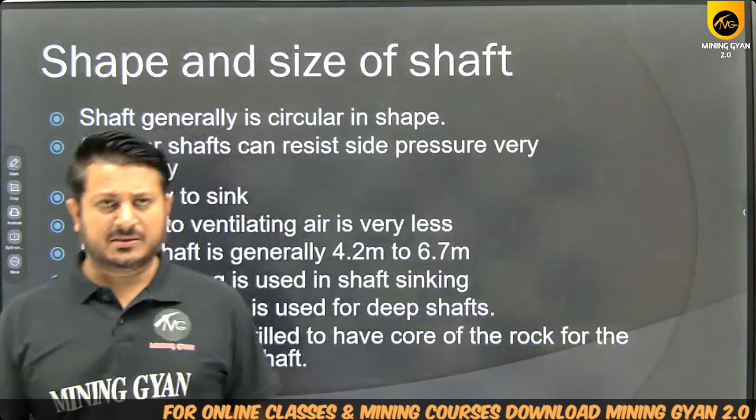So if we talk about the shape and size of the shaft, the shape of the shaft is generally circular. Most of the times it is circular only, and in some mines it is rectangular in shape, but most of the time it is circular in shape.

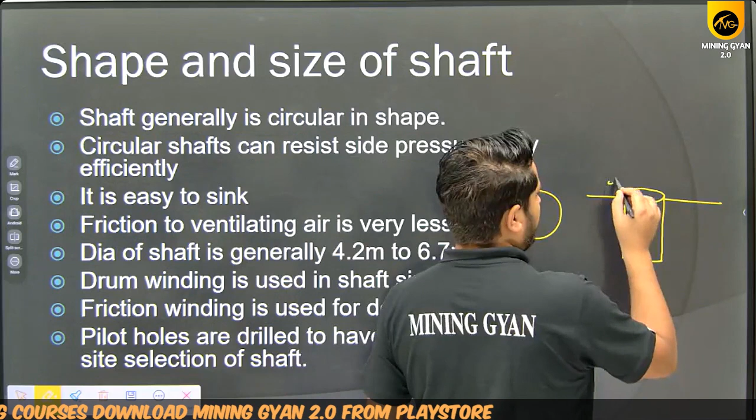As you can see over here, if this is a circular shaft, this is the top view, and this is the front view. Now if this is your surface, you can stand over here. Now this circular shaft, there will be a pressure from the sides over this circular shaft, over the entire length of this circular shaft. So this circular shaft will have to resist pressure from the sides which are occurring on it. If we see in the top view, the side pressures which are occurring on it are like this, this pressure, side pressure, will be like this if we see the top view.

Now if there is a rectangular shaft, then what will happen? What is the reason why we don't use to make a rectangular shaft? The reason for not making a rectangular shaft is that if the side pressure comes on it, then in that case they will bulge out. The sides of the shaft will bulge out like this. There will be a deformation.

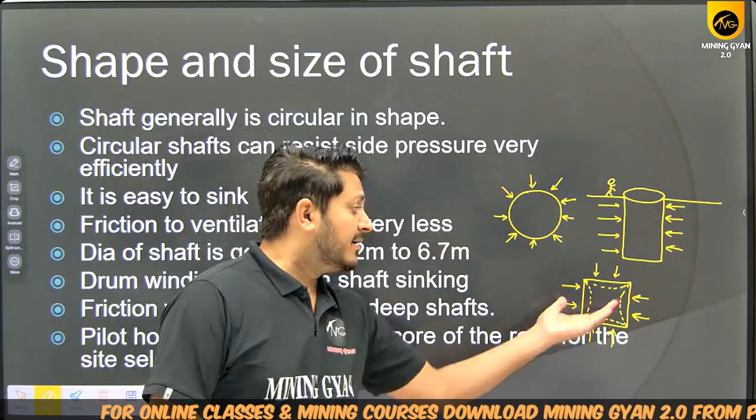While on the other hand, in a circular shaft no such cases can be seen, because there will be compression. If the side pressure comes, then in that case there will be compression from both the sides, and it can resist the side pressure much better than the rectangular shaft. That is the reason why rectangular shafts are not made. This is the reason.

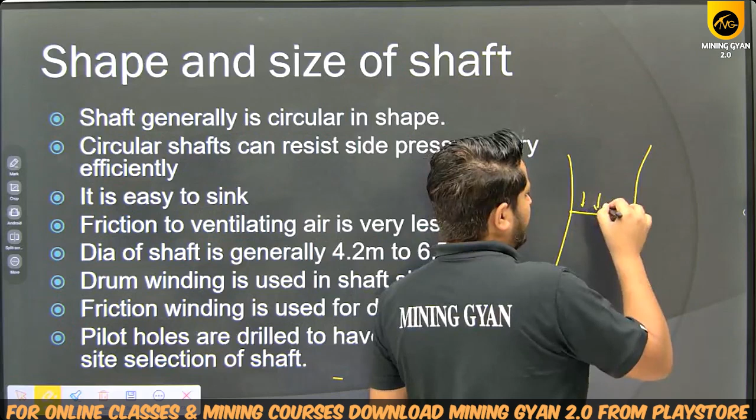Suppose, if you want to feel this thing a much more broader way, then I can give you an example. Suppose that there is a river. This is the top view of the river, you are watching it from the top. Now in this river, if we used to make a dam like this, then in that case what will happen? The water pressure will come over it, and due to that pressure, it will get deformed.

If there is high pressure, it will get deformed like this, and after some time, cracks will develop on it, and this will break. But if we follow the arch method - make the dam like this - now if the water pressure comes on it, there will be compression. The stress that will generate over here will be compression, and due to that stress, it may get straight, but it will resist much more better than this type of dam, that is dam number 1. Dam number 2 will resist much more better than dam number 1. This is called the arch method.

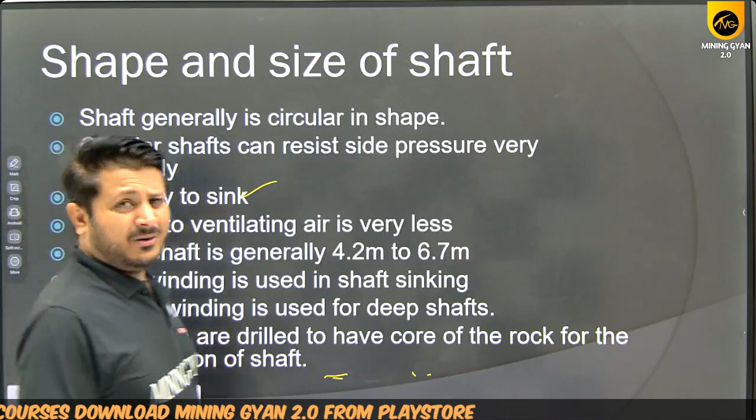Arch method. These are the things you have to remember. The most important thing is that circular shaft sinking is easy to sink. It is very easy to sink. Along with that, it provides less friction to the ventilating air as compared to the rectangular shaft. So there is very less friction to the ventilating air.

If we talk about the dia of the shaft, it is approximately 4.2 meter to 6.7 meter. For drum winding, if you want to do shaft sinking, drum winding is used. Just remember, in shaft sinking only drum winding is used. Friction winding is not used in shaft sinking. Friction winding can be used in deep shafts, but only after shaft sinking is complete. Otherwise, during shaft sinking you have to use the drum winding arrangement.

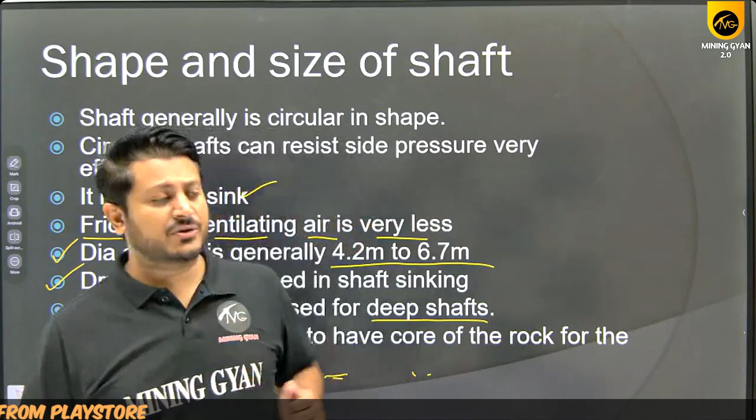For knowing this, we used to drill the pilot holes. With the help of the pilot holes we used to get the core, and with the help of that core we used to come to know what is the strata - is it a water bearing strata or not, is there any type of fault or geological disturbances or not. On that basis, what type of rock or strata is there, whether it's soft rock, soft soil, or a hard strata. In general, such information can be gained with the help of the pilot holes and the cores collected from them. This will help you out for the site selection of the shaft.

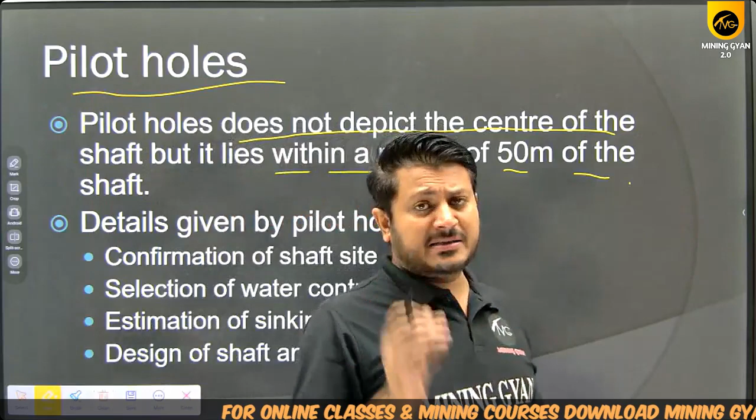चलिए, अब पायलट होल्स की बात उठी है तो देख लेते हैं पायलट होल्स क्या है। पायलट होल्स डज नॉट डिपिक्ट द सेंटर ऑफ द शाफ्ट, बट इट लाइज विदिन अ रेडियस ऑफ 50 मीटर ऑफ द शाफ्ट। आप ये नहीं सोचेंगे कि जहाँ पायलट होल ड्रिल किया वही शाफ्ट का सेंटर होगा। You should not think that if you have drilled a pilot hole then that pilot hole will be at the center of the shaft. No, it's not like that. The other case can be that the pilot holes will lie within a radius of 50 meter of the shaft, but they will not be the center of the shaft. You should remember this thing.

आपका पायलट होल शाफ्ट के 50 मीटर के रेडियस में होता है जनरली, बट वो शाफ्ट का सेंटर नहीं माना जा सकता। अब पायलट होल्स हमें क्या क्या डिटेल्स देता है? सबसे पहले तो कंफर्मेशन ऑफ द शाफ्ट साइट, इट गिव्स डिटेल्स अबाउट द कंफर्मेशन ऑफ द शाफ्ट साइट।

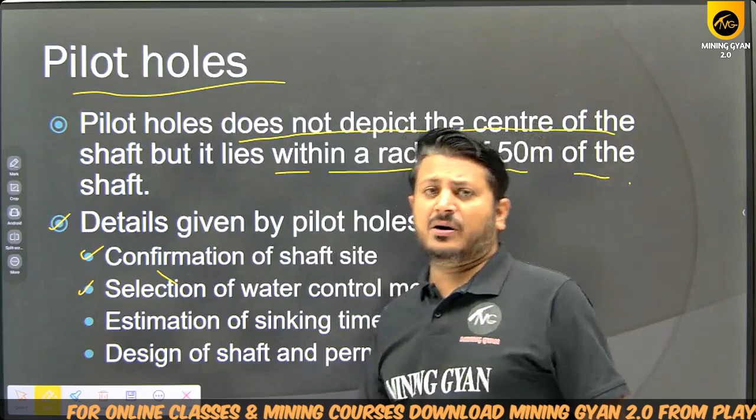On the other hand, selection of the water control methods. If you have a water bearing strata and you also have to construct the shaft, then in that case it will give you the method. On that basis, or on the basis of the study of the core, you can decide what type of water control methods should be applied in the mines, during shaft sinking or the whole life of the shaft, so that they should not get collapsed.

After that, estimation of the sinking time and the cost. You will also get the estimation of the cost, what amount of money you have to invest, and the time, what quantity of time you have to invest, because time is money. Just remember this thing, time is money.

Now, design of shaft and permanent lining. You can get the details. So if you have the details of the strata, what type of strata we have, what geological disturbances are there, then on that basis you will design your shaft. You will decide the permanent lining which has to be provided on the shaft, so that your shaft should remain stable till the whole life of the mines. Remember this thing.

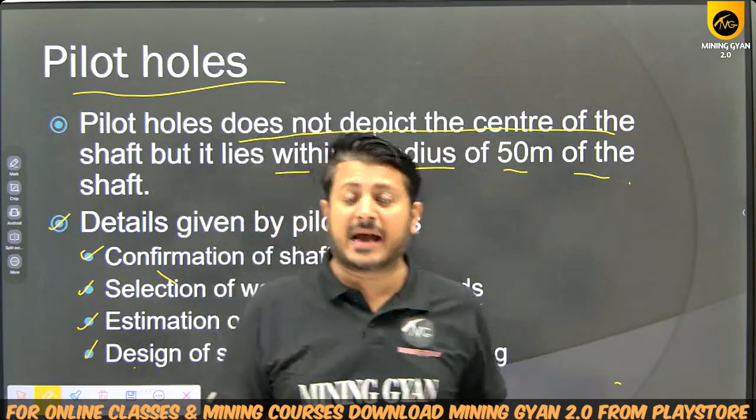सो आपका पायलट होल्स क्या क्या डिटेल्स देता है? ये सब बता देता है कि आपका शाफ्ट कहां बनाना है, इसकी जानकारी दे देता है। उसके साथ ही अगर आपको पता है कि मेरा वाटर बेयरिंग स्ट्राटा है, तो उस केस में वाटर को कंट्रोल करने के लिए क्या मेथड्स अपनाने हैं, ये जानकारी मिल जाएगी। उसके साथ ही आपको पता चल जाएगा कि कितना पैसा और कितना टाइम लगेगा, तो उसके बेसिस पे आप एस्टिमेट बना सकते हैं, नहीं तो बीच में पैसे खत्म हो गए तो काम रोक नहीं सकते। दूसरा, आपका शाफ्ट का डिजाइन भी आप डिसाइड करोगे और उसके साथ ही परमानेंट लाइनिंग भी डिसाइड करोगे कि आखिर कौन सी परमानेंट लाइनिंग प्रोवाइड करानी है।

अगर मैं बात करूं रेक्टेंगुलर शाफ्ट की, तो आपका रेक्टेंगुलर शाफ्ट कहां पर बना हुआ है? इंडिया में आपका मोचिया मोगरे माइंस, ये एक एग्जांपल है जो कि जावर, राजस्थान में है।

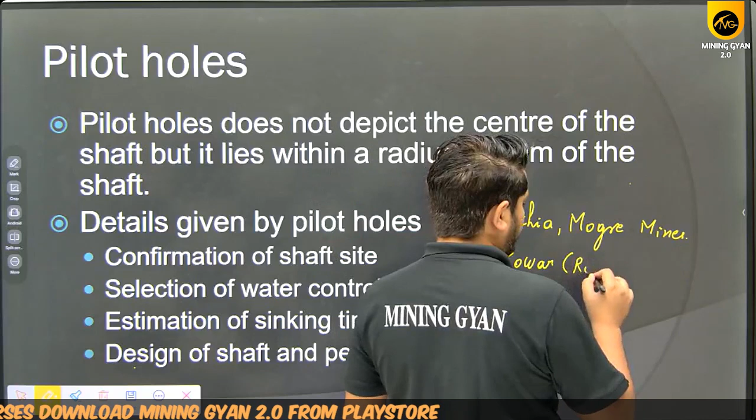A rectangular shaft has been constructed in the Mochia Mogre mines in Zawar, Rajasthan, by Hindustan Zinc Limited. It has a rectangular shaft of dimension 5.2 meter into 2.8 meter, and the depth of that shaft is 321 meters, having a 30 centimeter thick concrete lining.

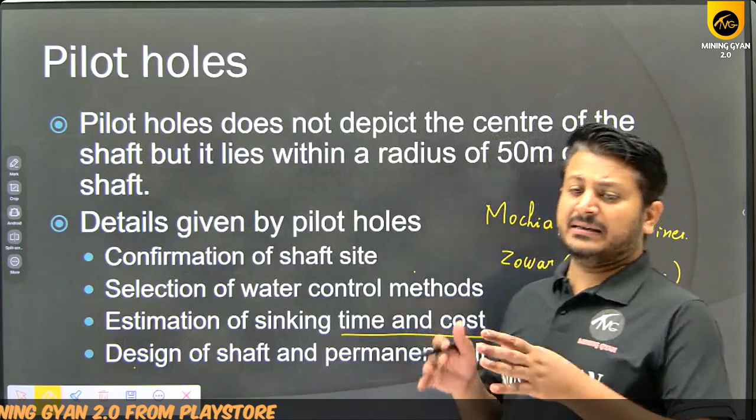Now if we talk about the cost of shaft sinking, earlier, based on the early data, the cost of shaft sinking was approximately 50,000 to 75,000 per meter. It includes all the things like sinking, lining with concrete, headgear, winding engine, and the concrete. All these things are included in this 50,000 to 75,000.

Okay, clear? Any type of doubt?

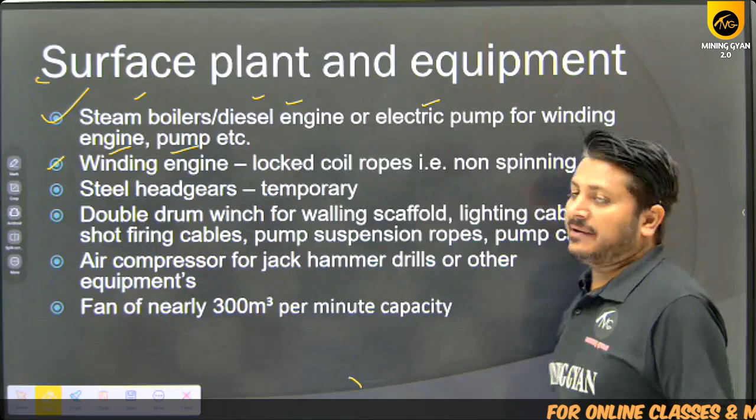The next thing which you have to arrange is the winding engine having locked coil ropes. What is the use of the locked coil ropes? Locked coil ropes are basically non-spinning type of ropes. You have to remember this thing. The reason for using locked coil ropes, or non-spinning type ropes, is that in the case of shaft sinking, the bucket is hung freely.

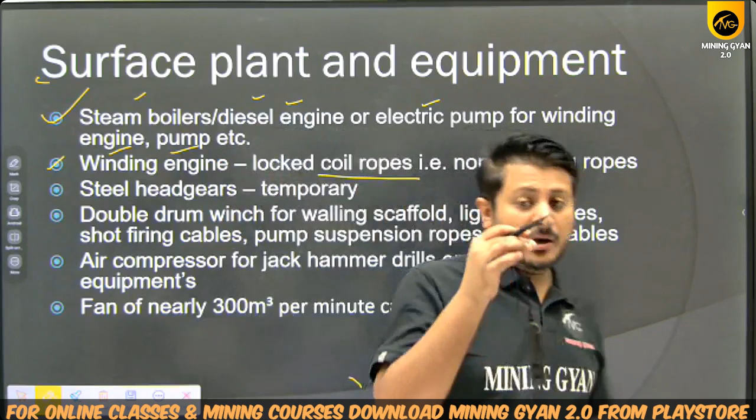Suppose that this is a bucket. If I use it to sink it, then it will rotate, like this. So this is called spinning, and to stop this kind of spinning, what we have to do is just use the locked coil ropes. Locked coil ropes will stop it from spinning, and this will go down directly.

Why does such kind of thing occur in the shaft sinking, during shaft sinking only? This cannot occur after the shaft sinking also.

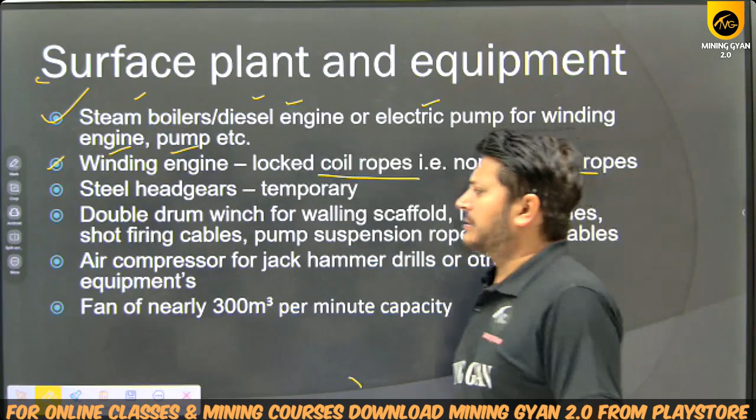So there is a steel headgear. This can be temporary, on a temporary basis. On the other hand, we will use the double drum winch for the walling scaffold. There is a winch, like during fishing, as you may have seen in the movies, where a winch arrangement is there in the fishing rod. With the help of that winch you can release the rope or wind the rope. Similarly, the double drum winch is placed during shaft sinking, so that...

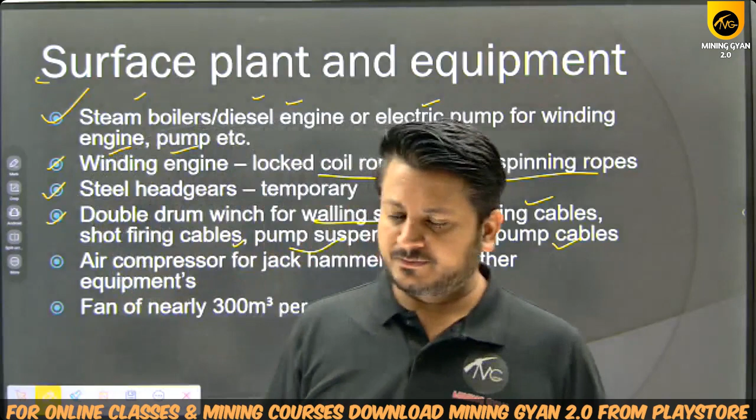...you can handle the walling scaffold, lighting cables, shot firing cables, pump suspension ropes, and the pump cables. All these things are controlled by the double drum winch, which is provided to suspend the walling scaffold, to hang the lighting cables, and for shot firing cables, pump suspension ropes, and pump cables - all these things are suspended using the double drum winch.

After that, an air compressor is installed, with the help of which you can operate the jack hammer drills and other equipments. There is a fan which has a capacity of 300 cubic meters per minute, placed near the shaft. The fan is placed in the shaft having the capacity of 300 cubic meters per minute.

So here a fan is also installed. As you can see over here, this is a shaft in which the rider is placed. This is your rider, this is your rider.

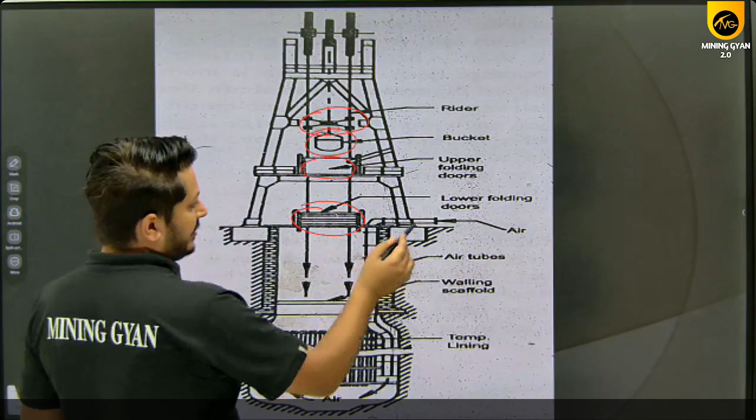Okay, this is your bucket. This is your upper folding door. This is your lower folding door. After that you have the air tubes running down the shaft, for providing air over here in this portion.

From here air comes out of the shaft. Now there is a walling scaffold. This is your walling scaffold.

Workers usually stand on this walling scaffold for providing the permanent lining. The other use of this walling scaffold is that it will help you out if anything drops from the top of the shaft. If anything drops from the top of the shaft, then it will not reach the man who is standing at the bottom of the shaft. No one will try to hurt anyone intentionally, but if by mistake something drops, then in that case it will provide safety.

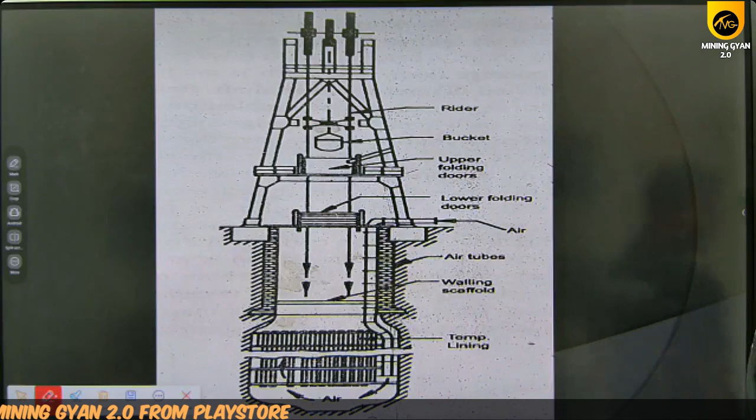What is the difference between swinging and spinning? I will show you, maybe if it does not fall, then it will be good.

This is called spinning, and this is called swinging. This is swinging and this is spinning. This is the basic difference between swinging and spinning, and the rider over here will help you out to prevent the swinging of the buckets.

So this is your rider, and after that you have the upper folding doors. Two doors you have, the upper folding door and the lower folding door. There is an air tube with the help of which you are able to provide air at the bottom of the shaft. After that you have a walling scaffold, over which your workers will stand and provide the permanent lining.

After that, your workers standing on it will provide permanent lining. Now at the bottom there is a temporary lining provided at the bottom, which will be removed after the depth of the shaft gets increased. Then after that you will provide the permanent lining.

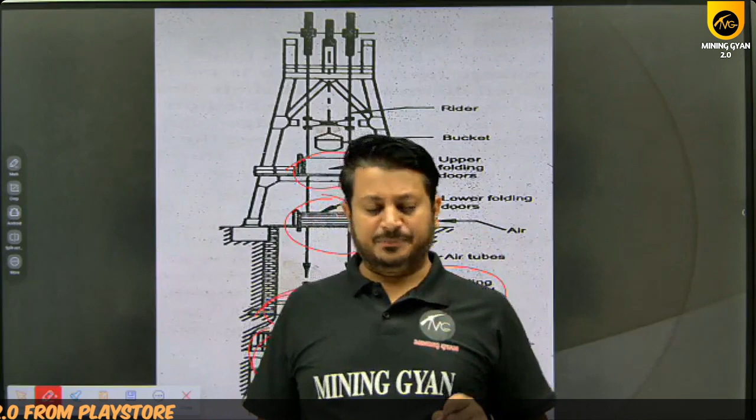Let me know if you are active in these classes, and if you have studied the legislation, tell me what must be the distance between shaft bottom and walling scaffold. Wait, I should write the question according to CMR 2017: what must be the distance between temporary permanent lining and bottom of the shaft? You have to answer these two things.

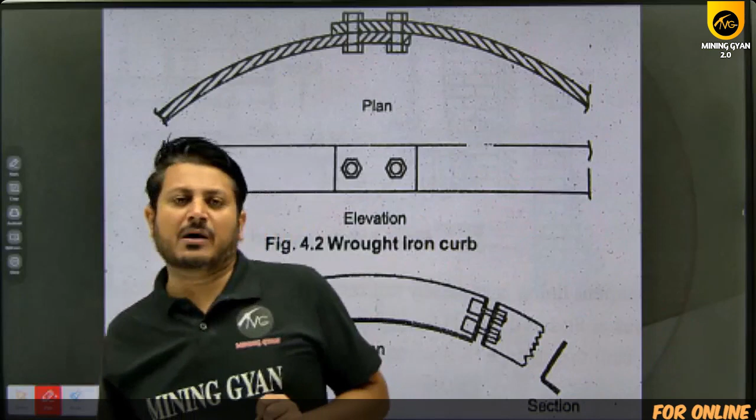Basically, if you want to do the shaft sinking for providing the temporary lining or the permanent lining, you have to place a circular ring all over the corner sides of the shaft. On this circular ring you can place your wooden planks, which will help you provide the permanent lining or the temporary lining. Both can be done with the help of this ring.

Along with that, all the equipment can be hung through it. This will help you control the shaft from collapsing.

The next arrangement you must have is the generator. It can be a diesel generator or a steam engine generator, and it will be used for lighting purposes.

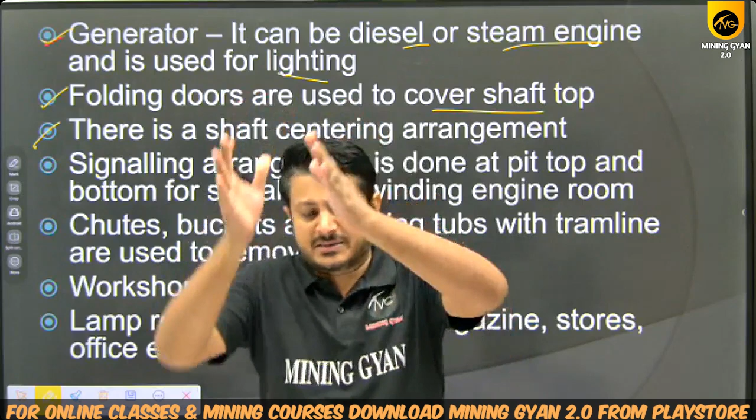After that, you need shaft centering arrangement. We cannot make the shaft in any random shape; we have to make a vertical shaft. So arrangements have to be made for shaft centering, from the center of which you can maintain your shaft diameter, and the shaft will go vertically downwards. This shaft centering arrangement is done.

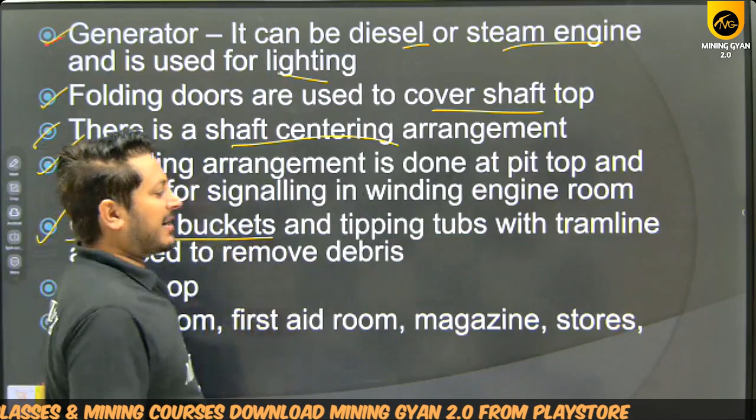Along with that, what else is needed? Chutes, buckets, tipping tubs with a tram line, so that debris can be removed. Debris means the waste material generated during shaft sinking, which can be removed with the help of chutes, buckets, or tipping tubs with a tram line.

There must be a workshop if any equipment gets damaged or needs maintenance. You must also have a lamp room, first aid room, magazine stores, and office, etc.

All these things have to be established on the surface. In this manner we have done all the arrangements for shaft sinking.

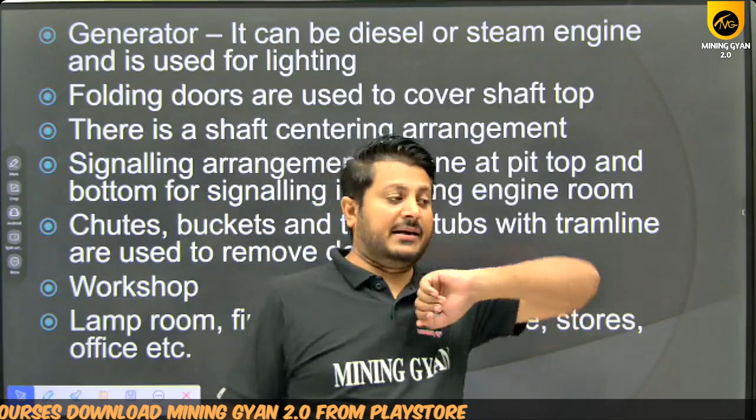Now we have to do the shaft sinking. First of all, we saw what the shape and size of the shaft should be. The second question was where we have to make our shaft, the site selection of the shaft. The third thing was what arrangements I have to do for shaft sinking. All the answers to these questions have been given. Now we have to find out how to do the shaft sinking.

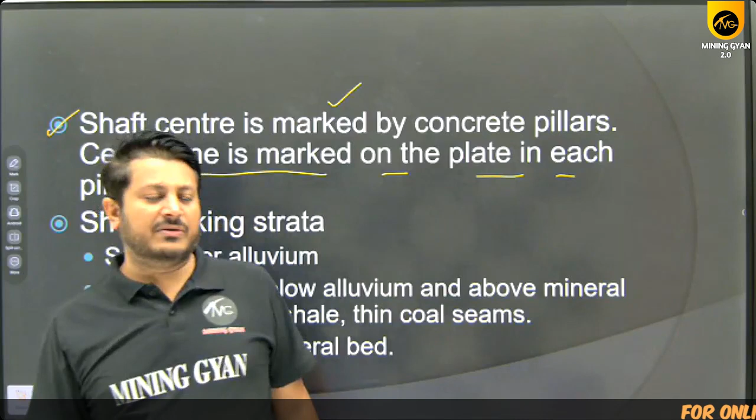Concrete pillars are made on which the center of the shaft is being marked, and there is a center line marked on a plate, and that plate is placed on these concrete pillars.

Now if we talk about the shaft sinking strata, what kind of strata will we get if we start shaft sinking? First of all we will get the subsoil and the alluvium. After that we will get the hard rocks, which will be present below the alluvium and above the mineral bed.

Sandstone, shale, thin coal seams. After that we will get the coal seam or the mineral bed. All these are the strata of shaft sinking which you will encounter during shaft sinking.

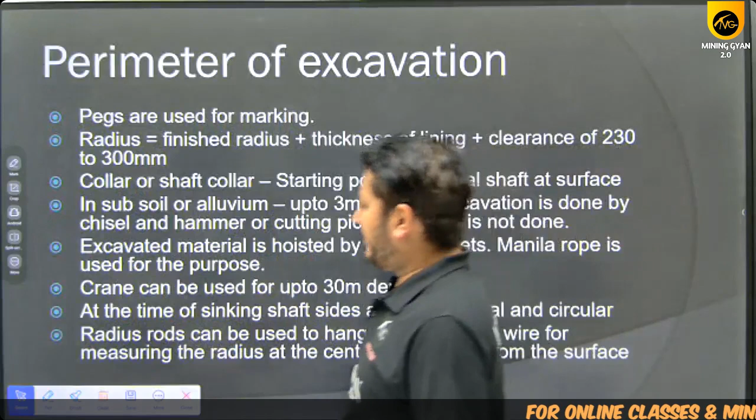Now, if we talk about the perimeter of the shaft, what must be the perimeter of the shaft? What do you mean by perimeter? That means perimeter of the shaft means circumference of the shaft.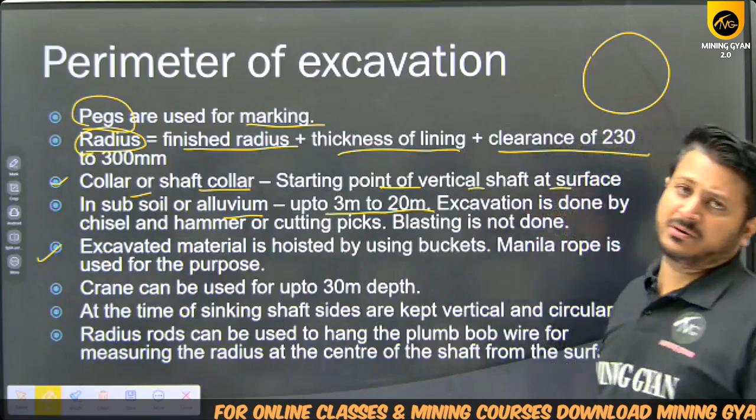After that, excavated material is hoisted with the help of buckets and the rope used for raising and lowering of the buckets. That rope is called the Manila rope. For that purpose, cranes can also be used, up to a depth of 30 meters.

At the time of sinking the shaft, the sides are kept vertical and circular. Radius rods can also be used to hang the plumb bob wire for measuring the radius at the center of the shaft from the surface. From the surface, you can measure the radius of the shaft by hanging the plumb bob wires at the center of the shaft.

After that, a concrete ring is placed over here, and you can see the shaft collar is made. This is called the shaft collar. It has an integrated steel edge, which acts as a cutting knife during the shaft sinking.

Just watch carefully. While making this shaft collar, the bottom ring has a cutting pick, it has a cutting edge, because as the shaft sinking progresses, these cutting edges will help to move the whole shaft in the downward direction.

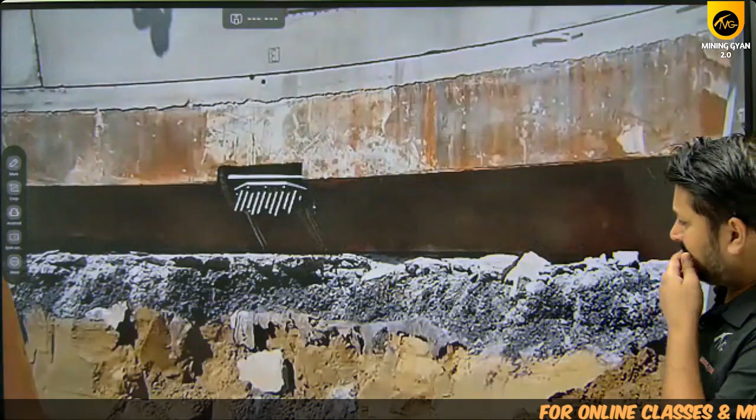The shaft is now held in position by this compact strand jack system. Preparation for the machine installation starts by using a dummy frame to position the brackets for the machine arm. This method means you don't have to do drilling and blasting, you can just use the cutting picks.

The VSM machine is assembled with correct alignment. This is also called the VSM machine, which is used for shaft sinking. It is placed over here. As you can see in the VSM machine, there is a cutting head that will basically cut the bottom of the shaft. Like this, it is placed in the shaft.

The shaft sinking equipment can now be installed. The 3 winches are used to lift and lower the machine. These are the winches which will lift all of the machine. As you can see over here, this is a winch. The energy and supply lines provide the machine with all necessary power and fluids.

This is the VSM machine, which is used for shaft sinking. This is an example of a complete site setup, as you can see, this is the site setup of the shaft sinking. Operations are powered and controlled from the container on the surface. Stored data, together with the position of the cutter boom, is shown on a graphic display, giving the operator full control of the excavation and sinking process.

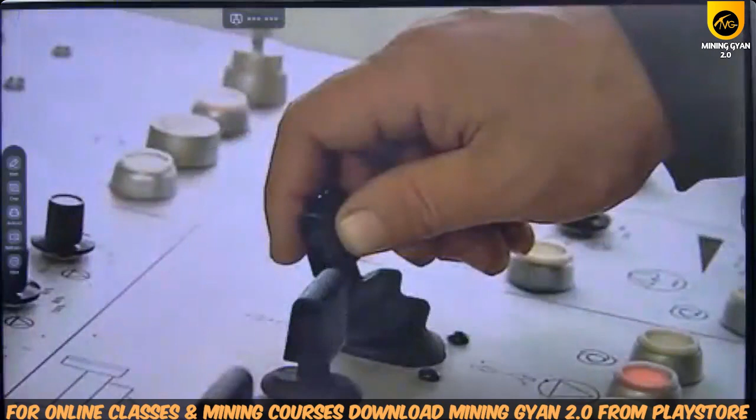The cutter boom can either be controlled manually by the operator or set in automatic mode for cutting the set profile in the required section. The shaft is kept full of water during sinking to balance the level of the groundwater table in the surrounding geology. In addition, the water itself is used as the transport medium for the excavated ground. Various depths of groundwater level can be handled. The flexibility of its telescopic arm rotation and slewing movements allows the cutter boom to work in shafts with inner diameters from 4.5 meters and outer diameter up to 18 meters, in water depths up to 80 meters.

The machine has a telescopic extension of up to 1 meter, after which you have to lower the whole arrangement. The cutting arm moves radially from the center, outside the shaft, with the cutting head visible here. In soft soil, the cutting edge on the shaft is used to cut and bring up soft soil, making excavation very deep and easy into the ground. The cutting speed and boom movement can be varied to achieve the best excavation rate.

When it's necessary to excavate under the cutting edge, such as in hard soil, the cutting edge moves downwards to extend the reach of the boom.

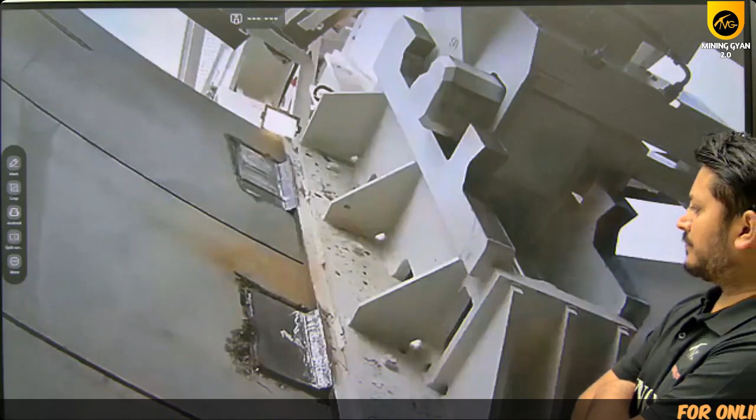Where hard soil is present, shaft sinking and construction of the next ring suits the shaft's purpose, using concrete segments with rubber sealing. As you can see, the next segment is placed here. In this manner, the whole shaft sinking procedure is done, and can take place continuously depending on the diameter, geology, and working hours.

The shaft is prepared with a built-in launch eye to exactly suit the tunneling equipment. An automatic bentonite lubrication system reduces friction between the shaft exterior and the surrounding ground during shaft sinking. The total number of nozzles is designed to suit the soil conditions.

When the shaft reaches the final depth, the VSM machine is removed and the concrete base block is cast. What is the full form of VSM machine? Vertical shaft sinking machine - this is called the VSM machine. Is it clear to everyone?

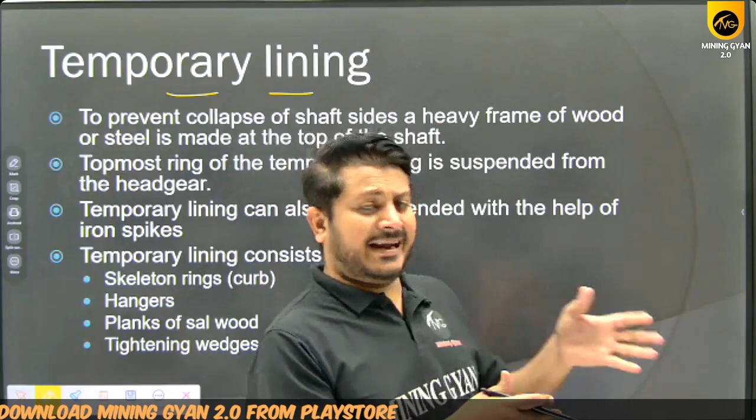Next, temporary lining. There are two types of lining: temporary lining and permanent lining. First we will do the temporary lining, then the permanent lining. Permanent lining remains for the whole life of the mine, while temporary lining remains only until you construct the permanent lining, or until it is safe to do so. Till that time, you have to rely on the temporary lining.

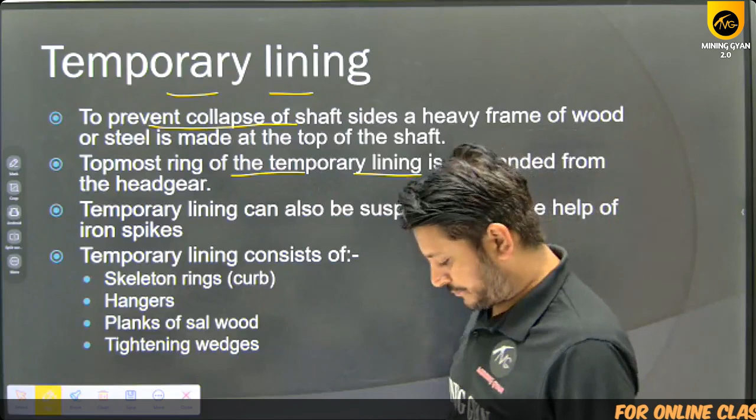First of all, you will make a temporary lining like this - something like this. In this manner the temporary lining is made, and this first ring is called the curb. The first ring of the temporary lining is hung into the shaft with the help of the headgear.

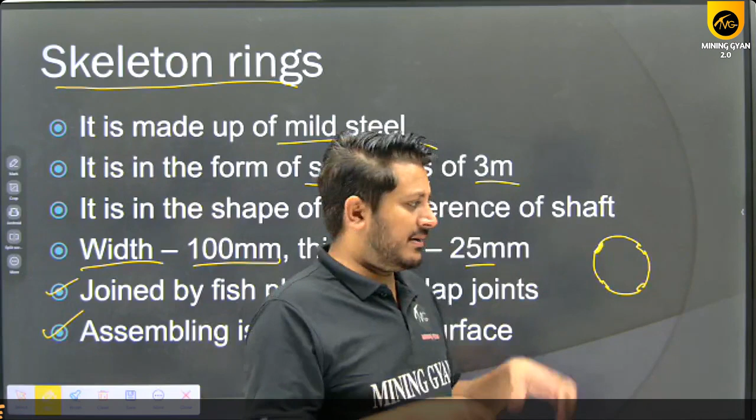It is kept suspended inside the shaft with the help of the headgear. After suspending it inside the shaft - suppose this is your shaft, this is your headgear, and with the help of the headgear, this ring...

After making it on the surface, this ring is hung or suspended in this manner with the help of the headgear.

After that, a second ring is hung from it. This is ring number 1, suspended with the help of the headgear. But the second ring is suspended with the help of the first ring using hangers which are S-shaped.

In this manner you can suspend rings one over the other. For joining the rings you can use the overlap joints as shown in the previous slide.

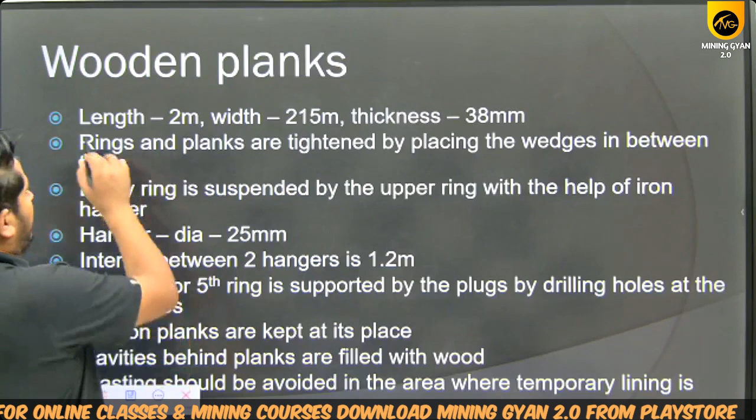If we talk about the wooden planks, the length is 2 meters, width is 215 mm, and the thickness is 38 mm. Length of each wooden plank is 2 meters.

So if you place a skeleton ring here, and at its bottom there is another skeleton ring, then you have to place a wooden plank in between them - a small piece of wood is placed in between them like this.

In this manner, all around in a circular manner, around the sides of the shaft, wooden planks are placed in the skeleton ring. These rings and planks are tightened by placing wedges in between them.

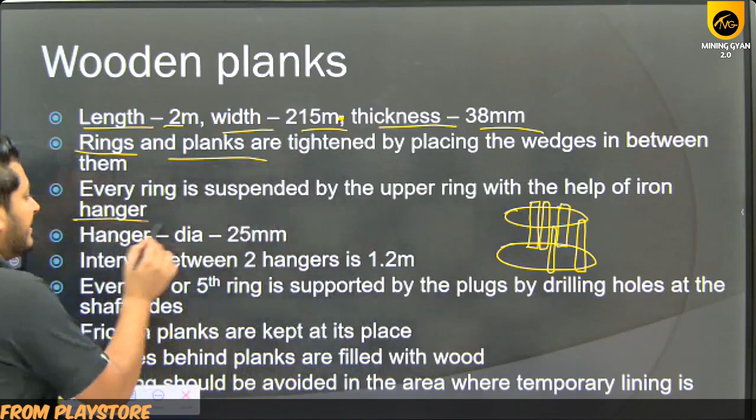Every ring is suspended by the upper ring with the help of an iron hanger. The topmost ring is suspended with the help of the headgear, but the bottom rings are suspended from the upper ring with the help of iron hangers, and the diameter of this iron hanger is 25 mm. The shape of the iron hangers is like this.

The shape of the iron hanger is like this. Suppose this is your ring from the side view - if you see the front view, the ring will look like this, but from the side, you will see this hanger, with the ring inside it like this.

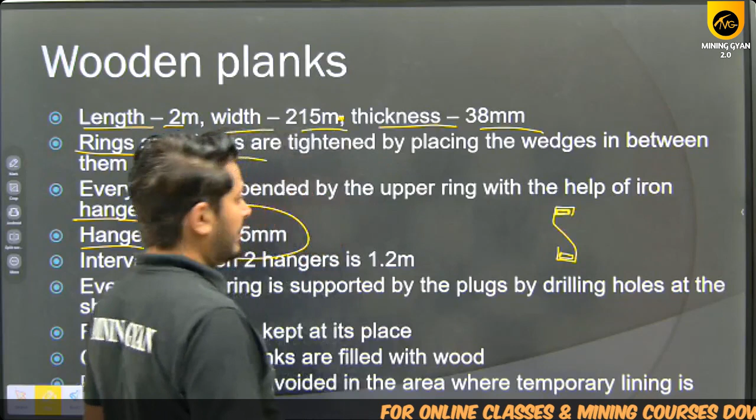After that, the bottom ring will be positioned here. This is your complete iron hanger, and the diameter of this hanger is 25 mm.

What will be the interval between two hangers? The interval between the two hangers is 1.2 meters. Every fourth or fifth ring is supported by plugs by drilling holes.

Okay, plugs, what do you mean by plugs? It is also a piece of wood which is inserted into the sides of the shaft so that extra support can be provided to them.

As you all know, if we hang or suspend each and every ring one below the other, with the help of the above rings, the weight on the upper ring will be very large and it may get collapsed. So for providing extra support, we used to place the plugs on the sides of the shaft. This will provide extra support.

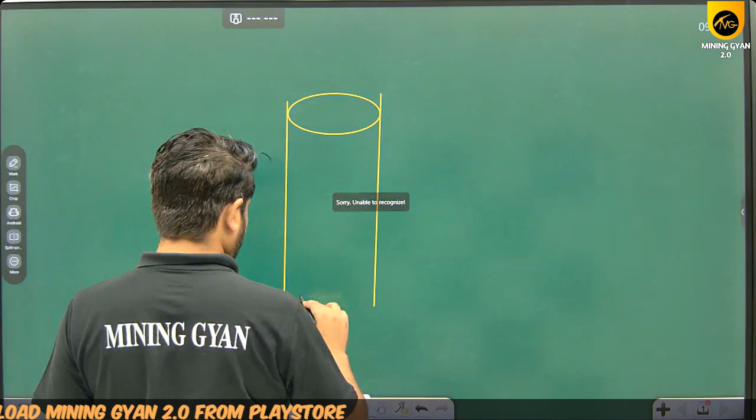Now, this is your shaft. As you are constructing the shaft, this is your surface and this is your surface top. From here, you have made a headgear.

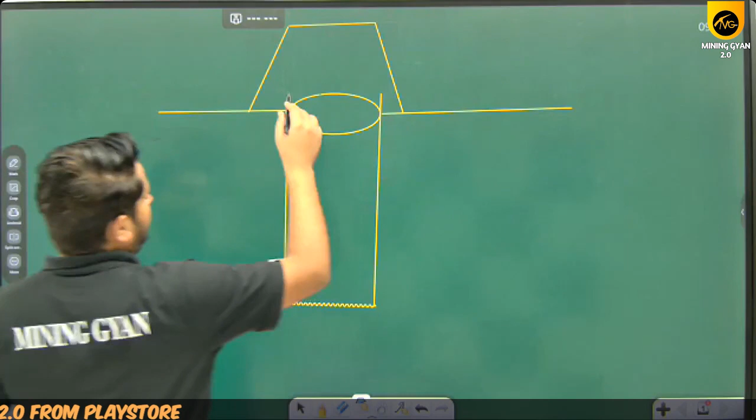Now, in this manner, you have made the temporary lining like this.

Now, behind the temporary lining there will be a gap between the temporary lining and the sides of the shaft. Then these cavities which are created behind the planks will be filled with the help of wood. Blasting should be avoided in the area where temporary lining is necessary, so I have to remember all these things also.

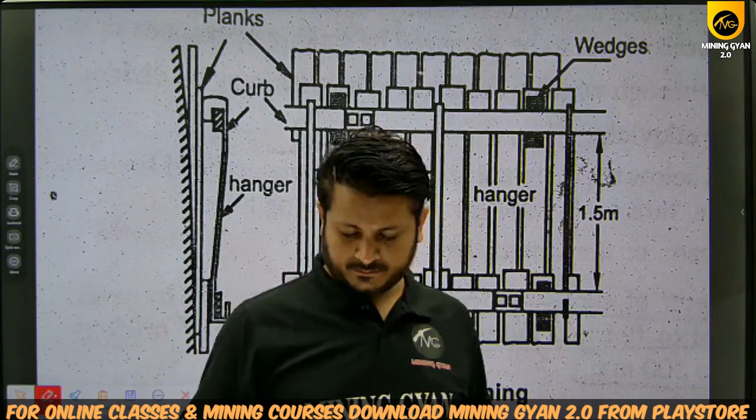As you can see, this is a small portion, meaning the shaft is circular in shape, cylindrical actually. We cannot show you the complete picture, but you have to use your imagination and just imagine you are watching a portion of that circular shaft. The shaft is circular like this, and you are just watching a portion of it, and that portion has the skeleton rings like this.

As you can watch over here, these are the skeleton rings. And after that, watch carefully, these are the wooden planks, sal wood.

And as you can see, this is a hanger. This is your hanger.

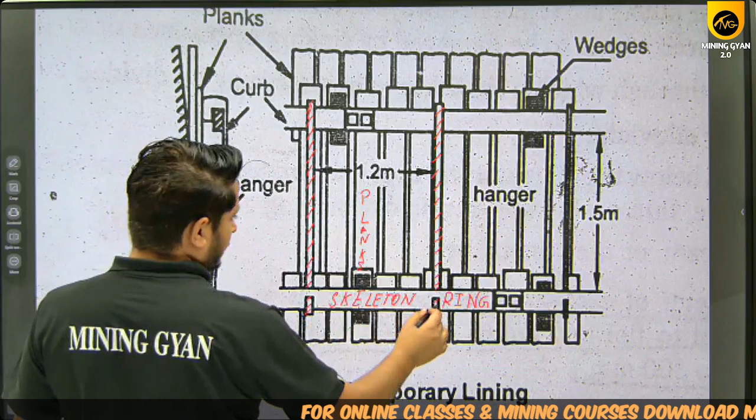Now, if you want to see this hanger, you have to just go to this side, near the shaft side. On reaching the shaft sides, you will see this will look like this, in this manner. This hanger will look like this, the hanger is in this shape.

It is in this shape, and the skeleton rings are placed inside it. So are you able to imagine each and everything?

So this is where your real imagination comes to reality. As you can see over here, these are the skeleton rings placed over here like this, and in this manner from behind it.

Sorry, these are hangers. And these are the skeleton rings which are joined with the help of the fish plates, or overlapping. As you can see, this is your skeleton ring.

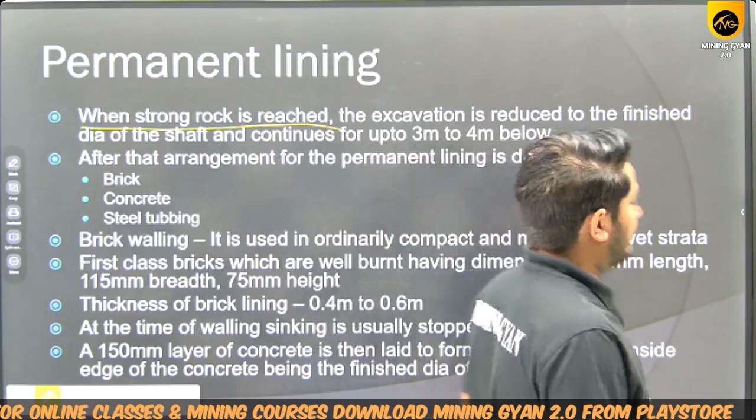So whenever you reach the hard rock, you will limit the dia of the shaft equal to the finished dia of the shaft, for up to 3 to 4 meters below. After that, you have to keep the excavation up to the finished dia of the shaft.

After the excavation is done up to 3 to 4 meters depth, the arrangement for the permanent lining is made, that is brick, concrete, and steel tubbing, which are arranged for the permanent lining.

Brick walling - now we will talk one after the other about all types of walling, whether you want to do permanent lining with brick, concrete, or steel tubbing. First we will do permanent lining with the help of brick.

This brick walling is used in ordinarily compact and moderately wet strata basically. If you want compactness to be very ordinary and the strata moderately wet, not too wet, then you can use brick walling. But which type of brick has to be used for this purpose?

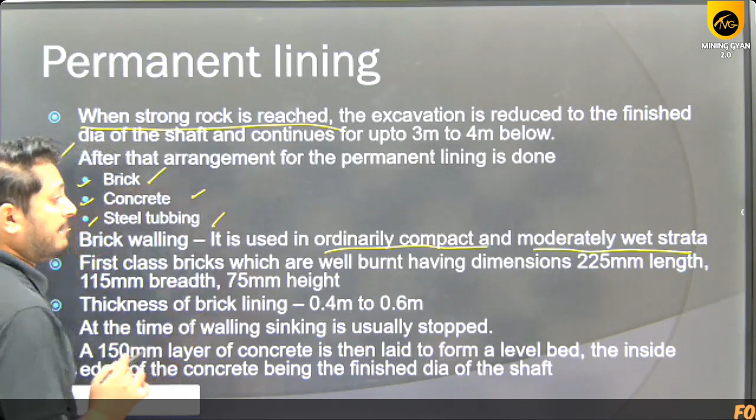The bricks must be first class bricks which are well burnt, having dimensions of 225 in length, 115 in breadth, and height must be 75. These must be the dimensions of the bricks, and they must be first class, well burnt.

The thickness of the lining in the case of brick walling must be 0.4 meter to 0.6 meter, and at the time of walling, sinking is usually stopped - you have to stop the sinking.

A 150 layer of concrete is then laid to form a level bed, the inside edge of the concrete being the finished dia of the shaft. In this manner you can do the permanent lining with the help of brick walling.

Now, after the concrete has been used...

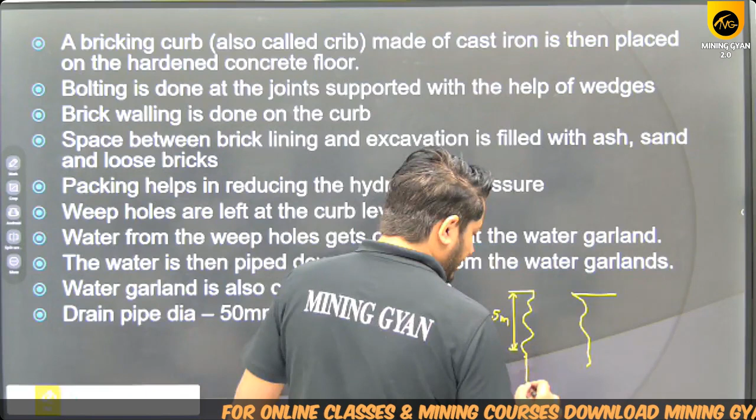Now when you reach the hard rock, you have to limit your excavation equal to the finished dia up to a depth of 3 to 4 meters. Just suppose that up to a depth of 3 meters you have kept your dia of the shaft equal to the finished dia.

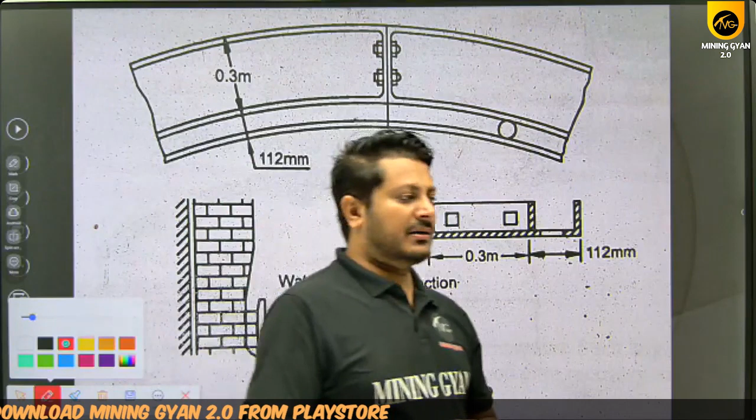Suppose that like at home also, if you are making your house, then first of all you will make a foundation which will be made of concrete. After that you will make the beams, which are also made of concrete, and the pillars you have to make are also made up of concrete.

So in this manner you have made a structure that will strengthen the brick wall. Similarly, while shaft sinking, if you are doing brick walling, you have to provide such a structure which will give extra strength to the bricks, and help them stand in position for a longer time until they get dried up and hardened.

For that purpose only we provide the concrete lining, with a thickness of 150 mm. After making the concrete lining, we use the cast iron for the bricking curb.

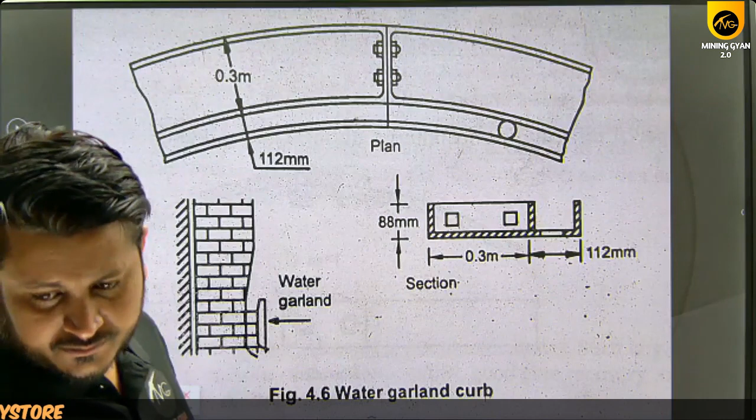Let me explain with the help of a diagram. Suppose this is your shaft - you are doing the shaft sinking now. First of all, you will do a lining of concrete in this manner. This will help you support the brick walling by reducing the water coming from the strata. In this manner you have completed the concrete lining.

After the concrete lining is completed, you will place a curb like this. After placing the curb, as you can see, you have placed a curb like this - this is your curb. On this curb you will place your bricks, so it will look like this.

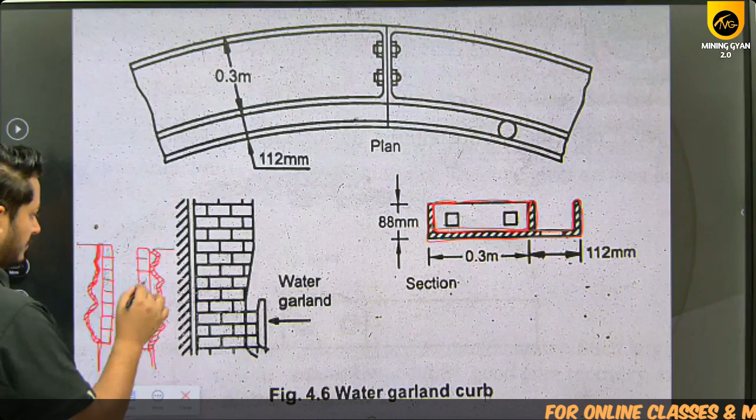Okay, this will look like something like this.

Now there is a space between the brick lining and the concrete lining. This space is filled with ash, sand, loose bricks - or I can say that this space is packed with the help of ash, sand, loose bricks, and any extra material which you want to use.

Now what is the reason we used to do the packing? Why do we do the packing? What is the main reason for doing the packing?

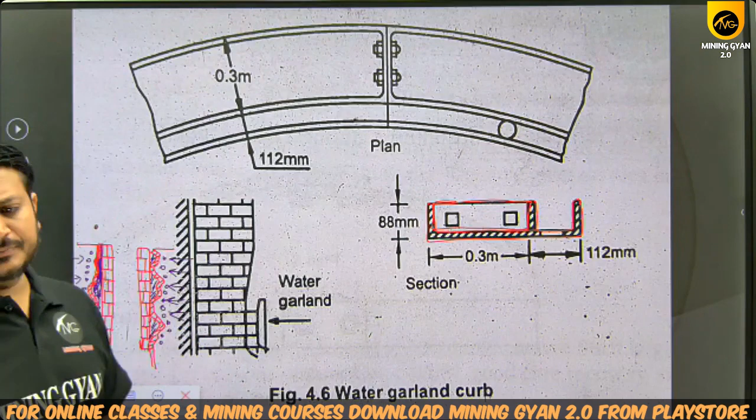basically packing is done as extra safety. That means if such hydrostatic pressure is so much that it can damage the brick walling, or if that pressure increases too much, then the packing will not be able to resist it. So what are the other safety measures we can take?

In that case, weep holes are made. What do you mean by weep holes? Weep holes are holes which are drilled into the shaft sides, or you can imagine a pipe has been inserted into the shaft sides. Imagine I have taken a pipe and inserted it into this wall. That pipe will not come out of the wall - it will be inside the strata, and I will just be able to see the hole, like a hole inside the

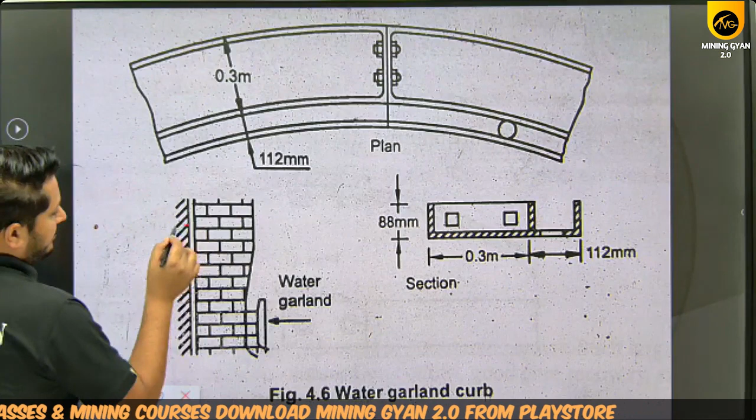Suppose there is a pipe behind, like this, in the brick walling. The water will come out from the surrounding and will come into this pipe, as there is a less pressure zone, then it will come out like this.

That's why it is called weep holes. When the water flows from the weep holes, it will go to the water garland. It will not try to wet the whole shaft, because this may create algae on the shaft surface, which will be much more dangerous for us. They will consume oxygen also.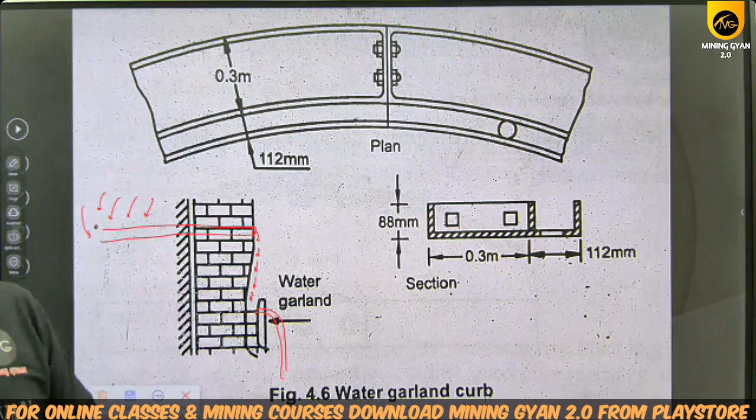Why do we not allow water to flow directly downwards into the sump or at the shaft bottom? The reason is there will be germination of algae. So we make water garlands just below the weep holes, around the shaft. The whole water gets collected into the water garland, and from there, a pipe is connected to the bottom of the shaft. The whole water will go to the bottom of the shaft. So this is the complete method by which you can make your shaft. The pipe used for transporting water from the water garland to the shaft bottom has a diameter of approximately 50 mm.